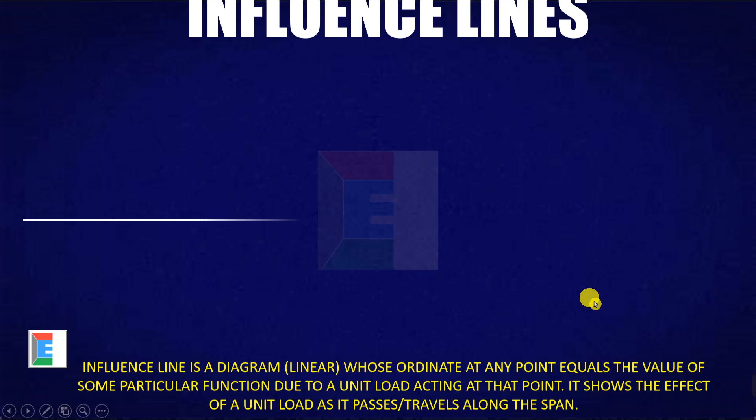Recap lang natin. Ano yung influence line ulit? Okay, refresh lang natin. Yung influence line, that is a diagram, linear, especially for determinate beams, whose ordinate at any point equals the value of some particular function due to a unit load acting at that point. Ito lang yung influence line diagram pag indeterminate na, curvilinear na yan. Again, linear siya pag determinate.

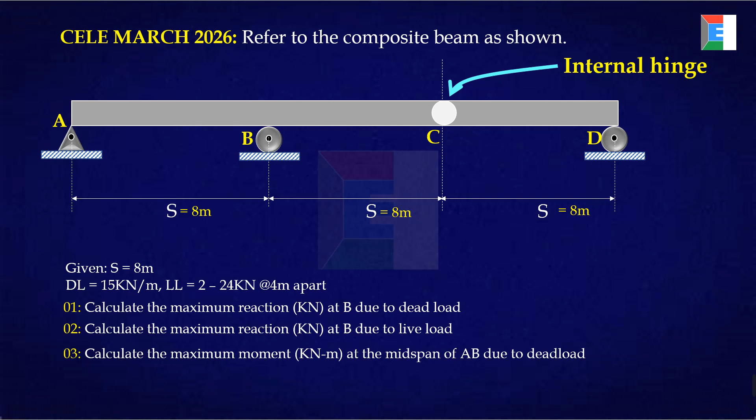So, whose ordinate at any point equals to the value of some particular function due to unit load acting at that point. It shows the effect of the unit load as it passes or travels along this line. Again, one more thing na kinocompute natin sa influence line is yung mga maximum values. Since yung mga problem ask for the maximum reaction, maximum moment, baka applicable si influence line diagram na concept, kasi yung goal lang man din niya dito is to calculate yung mga maximum values.

Okay, tandaan natin itong shortcut para sa influence line for beams. Ito lang naman yung shortcut niya. Kung meron ka ditong beam, simply supported, meron siyang length L. Then lagay natin, meron siyang point dito, Point B, which is, again, at distance A from left support and distance B from right support.

Kung gusto mong kunin yung influence line diagram for the reaction at A, akyat mo lang yan ng 1 unit. Klaro ba? Yan yung shortcut niya. Kung sa support C ka naman, gawin mo ng influence line diagram, akyat ka lang din dito ng 1 unit, and then linear na yan. Klaro ba? So ganun lang, yung influence line diagram for the reaction.

Take note na pag 1 yung isa, so meaning sa other support, laging 0 yan, kasi basta support, laging 0 kasi yan sila yan. Hindi lang magsi-0 yung support kung dun mo kukunin yung example, yun yung gagawan mo ng influence line diagram. Klaro ba? And then for shear naman, ganito lang, yung A lang divide mo lang ng L, at dito naman sa right, yung B, divide mo ng L. And then for the moment, multiply mo lang yung dalawa, then divide mo ng sum nila, kumbaga A times B over A plus B, or yung L.

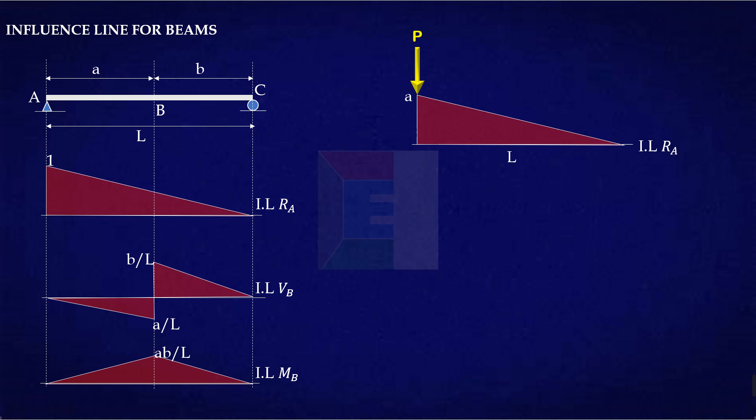Ganun yung shortcut. Once you have the influence line diagram, ganito na, and you want to calculate yung maximum reaction mo sa A, provided na may point load ka, so yung gagawin mo lang, para makuha mo yung maximum reaction ng RA, basta point load, matik, multiply mo na doon sa ordinate, kasi doon lang man din siya nag-act. So ganun, again, that is maximum reaction.

Klaro ba? At kung yung loading is uniformly distributed, walang triangular dito, yung load lang dito is uniformly distributed and point load. Kasi ano man to, moving loads, yung sa wheel load saka yung sa train load naman to. Kumbaga meron kang uniformly distributed. Pag yan naman yung loading, since yung uniformly distributed is acting sa entire influence line diagram niya, kukunin mo lang yung magnitude niya, then multiply mo ng area. Ganun lang yung mangyayari. Kumbaga, to get the maximum reaction due to uniformly distributed load, W lang times yung area nito, which is 1/2 nung base times yung height, A. Klaro ba? Tandaan niyo yan.

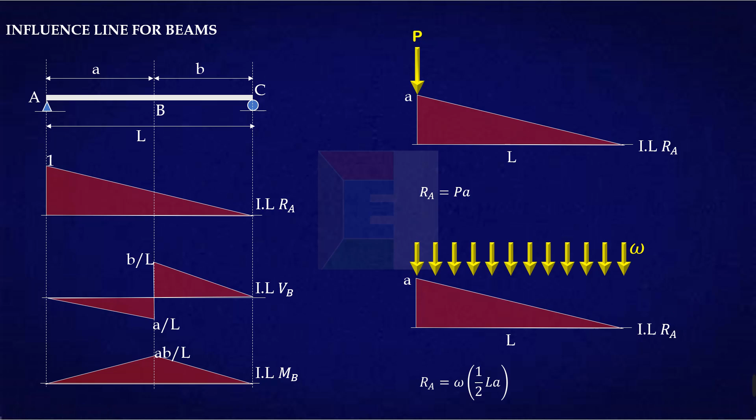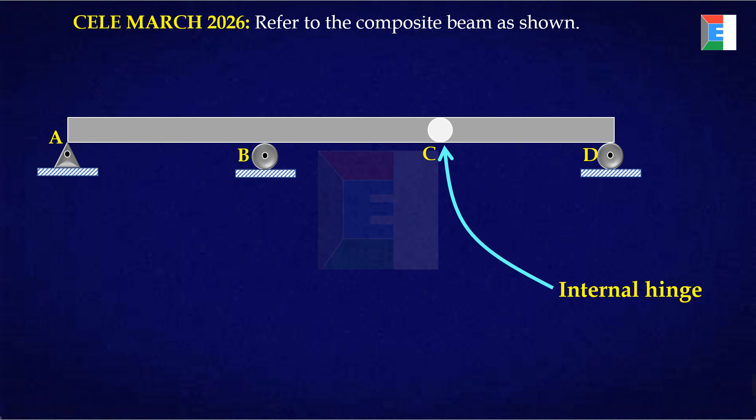So solve tayo na, balikan natin yung March 2026 na problem. Okay, kumbaga yung problem, meron tayong beam, supported with A, B, and D. Then meron tayo ditong internal hinge sa may point C. Klaro na. And then that is space equally by 8 meters, kumbaga 8 meters, 8 meters, 8 meters.

Klaro? Ayan. So gawin natin 3-dimensional para maganda tignan, then parang na-visualize din natin. Ito, parang ano to yan? Ayan, ganyan. Then ito, another segment to. Okay, para klaro. Ayan, okay ba?

So parang analytical model kasi to. Gawin natin yung parang, tingin ko lang realistic model niya.

Okay, yung internal hinge na yan, so magiging parang shear splice connection. Hindi talaga parang shear splice connection, no? Okay, klaro ba? So ito lang yung atakihin natin para mas makakita natin.

Okay, ganito pala yung kanya. So ngayon, alam natin na basta pag internal hinge, yung meron is meron siyang shear, no? May reaction dyan, di ba? Pag nag-analyze tayo, may statics. So alam natin may shear dyan, pero walang moment, no? Yung property ng internal hinge is may shear siya, pero wala siyang moment.

Okay, kaya kung gagawan mo ng influence line diagram, yung internal hinge mismo, wala kang magawa, no? Like purely line lang, no? Walang ano ba, no, kasi yung moment dyan sa internal hinge is equal to 0. Kaya since shear lang yung meron siya, kaya sometimes we call that one as shear splice connection.

Okay, klaro ba? And then, one property ng internal hinge is, nahihiwalay mo yan, no? Like pwede mong i-analyze yan as ganyan. Analyze mo yung overhang, and analyze mo to.

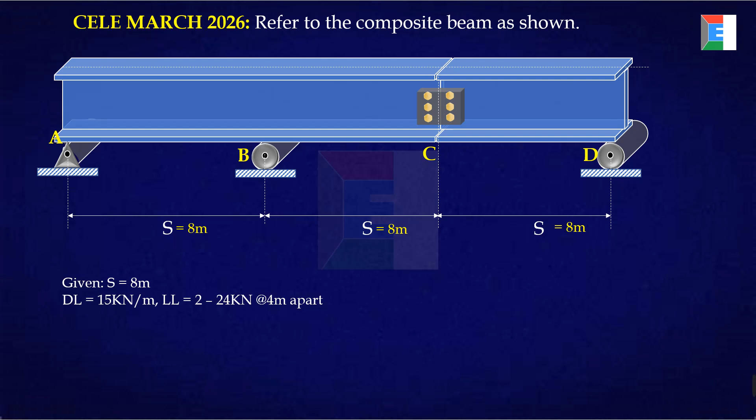So since yung dead load natin is 15 kN per meter, live load's 2-24 kN at 4 meter apart. So again, calculate the maximum reaction at B due to dead load, due to live load, and the maximum moment at midspan of AB due to dead load.

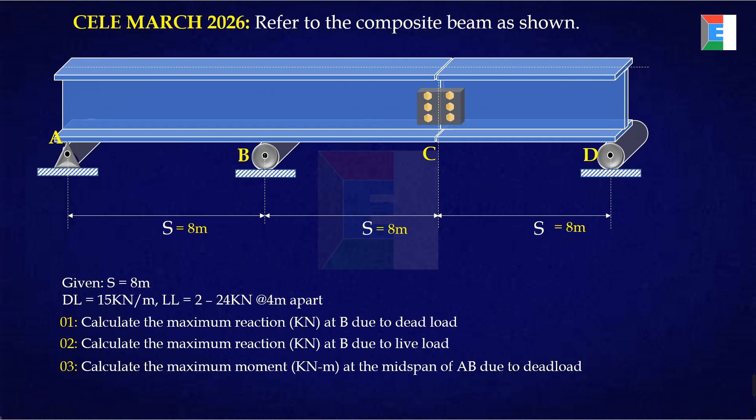Unahin natin i-solve first yung maximum reaction at B due to dead load. So ito yung dead load natin, di ba? It is loaded with 15 kN per meter. Self-weight niya yan, so meaning hindi na puputol yan, hindi na stretch yan. Like fixed talaga yan, entire length ng beam mo. Ha, so ganun.

So yung tanong is the maximum reaction at B. So gawa tayo ng influence line diagram for the reaction at B. So yung gagawin natin pag gagawa tayo ng reaction dito sa point B, bali papalitan natin yan ng spring.

Parang ganyan. Okay, parang ano yan ba? Imagine mo may spring ka, na. Then itry mo siyang i-push. I-push mo siya ba, na. Imagine mo, ipupush mo yan. Then pag i-release mo yan, di ba magbabibrate yan? Parang aakyat yung spring kasi kinimpress mo, aakyat. Ganon din yung nangyayari dito. So parang kinimpress mo to, then i-release mo yung spring.

Klaro ba? So yung mangyayari ganito. Isang segment to, yan, kasi ano to, internal hinge. Isang segment to, isang segment din to. Okay, ito tsaka ito, isang segment yan.

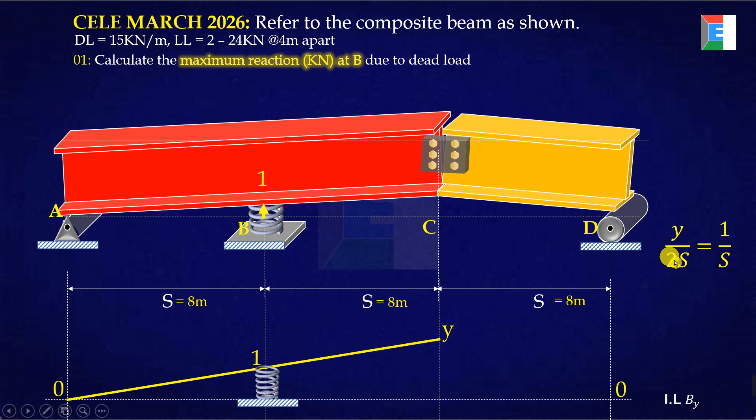So yung height niya is y over nung full distance niya. So kumbaga, y over nung dalawang s. And then 1 over nung isang s lang. And then kumbaga, y is equal to 2. So 2 bali ito, then ito na.

So connect na natin yan. So ito na yung influence line diagram natin for the reaction at By. Okay, klaro? Nice.

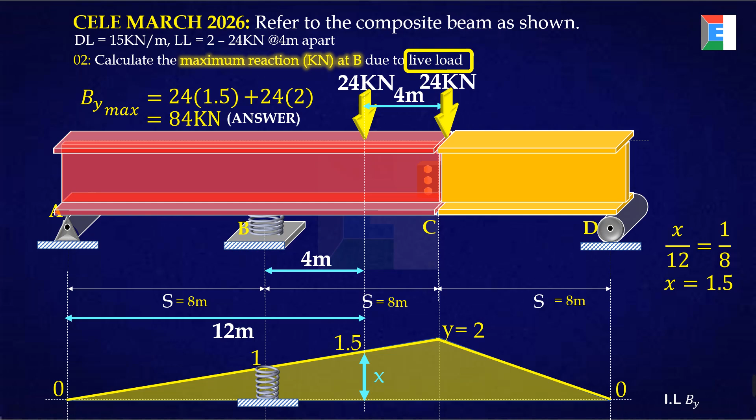Okay, problem number 3. What is the maximum moment at the midspan of AB due to dead load? So due to dead load only. Now what we need to find is the maximum moment at midspan.

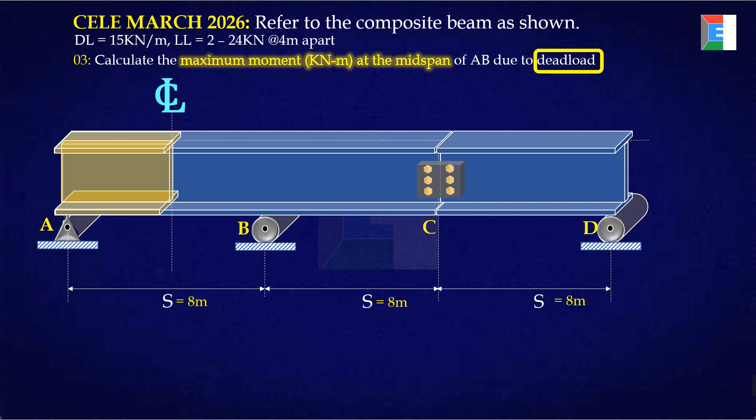We're forced to cut the beam just to expose the maximum moment. So that's one segment, and this is another segment, making two segments. Then the third segment is this CD. So we are dealing with 3 segments now.

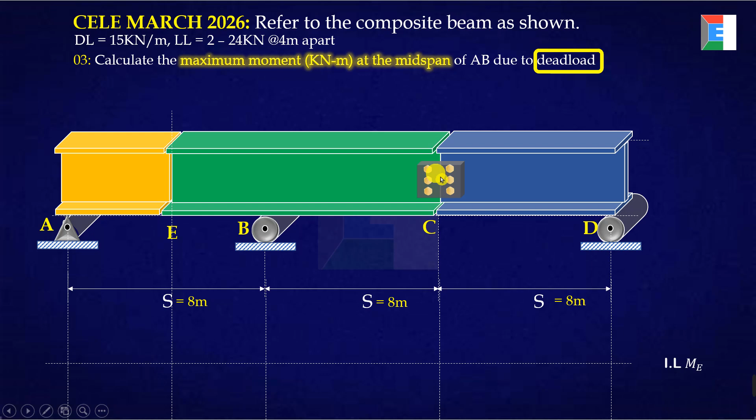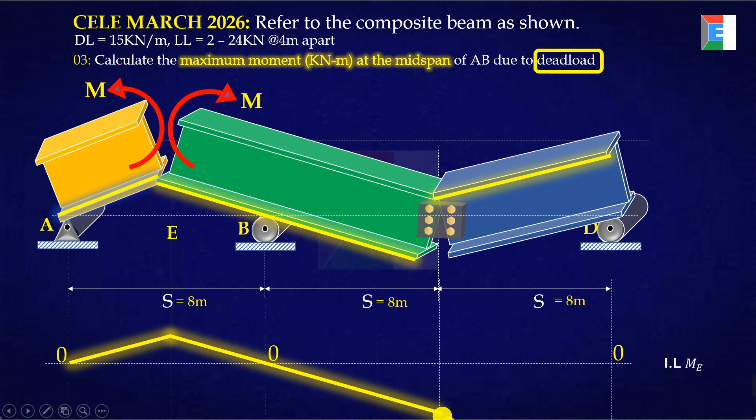Then itong segment na to, connected siya dito, konektado din yan sila, di ba? Pag ganyan mo dyan, akyat yan, akyat. Ito, konektado kasi connected yung dalawa, eh. So madadamay lang ito. Okay, kaya for this one, connect natin siya dito. Then 0 na din tayo dito. So di ba pareho lang silang itsura?

Huh? So yan yung influence line diagram natin for the moment at the midspan, or at E. Klaro!

Charis. Okay, so ngayon, we have E yung goal natin. So midspan man, so kung 8 meters, so halfway, 4 and 4 meters. So di ba yung shortcut is kukunin mo lang yung AB divide ng L. Pero hindi yung overall L, yung length lang between yung span mo. So kumbaga, 4 times 4 over 4 plus 4. Okay? Or 4 times 4 over 8.

So yan yung magiging ordinate mo dito. Klaro? Yes sir, yes sir. Okay, 2 units. Okay, ngayon, yan lang yung pwede nating isolve, na? So dito, magre-ratio and proportion ka na dito.

Okay ba? Ngayon, marami kang triangle. Oh, may triangle ka dito. Ito, another triangle. Ito triangle din, ito triangle. Anong triangle yung gagamitin mo for the ratio and proportion? So gagamit ka nung sa tangent pa rin, ha? Pero dapat, yung kukunin mong triangle, yung nag-share ng the same angle.

Which is, okay? Para ma-solve mo to ba? So ano yung gagamitin mo na triangle? Hindi pwedeng trip-trip lang, na? Like, ito lang yung gamitin ko sir, tsaka ito. Hindi pwede, na? Ito lang sir, tsaka itong dalawa. Kasi magkatabi sila, na? Walang ganun, na? Okay? So yung gagamitin mong triangle is yung may the same angle.

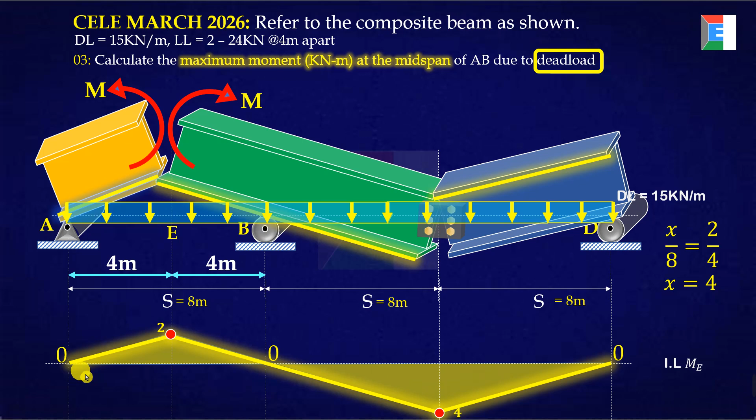Okay? So ilagay ko lang dito yung load ha, sa may itaas. So meaning ito, since this is above x, so we will be using positive dito. Then ito is below x, so negative to. Kasi magkasalungat sila, di ba? So dapat lang na magbaliktad yung sign nila. So ito siya is plus, ito siya minus. So ganun yung mangyayari na, no?

So we have 15 times yung area nito. So kumbaga, yung maximum moment natin at midspan or at point E is 15 times 1/2 of the base, 8, yung height 2. Klaro tayo dito?

Hindi pa tayo tapos, ha? Meron pa tayo dito sa baba. So minus tayo na. So minus nung 15 times yung area naman nito, which is 1/2 of the base, 16, times yung height niya, which is 4. Klaro? I think wala na, na? So using your calculator, masolve mo, negative 360 kilonewton meter. And that is now our final answer.